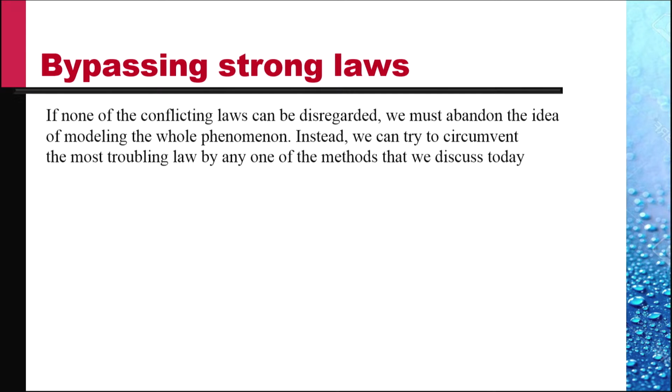Welcome back. We continue in this lecture the justification and process of relaxing the model rules. We discussed in earlier lectures that if there is a weak law conflicting with some strong laws, then we can neglect the weak laws, and we learned the techniques of doing so. But if none of the conflicting laws can be disregarded, we must abandon the idea of modeling the whole phenomena. Instead, we can try to circumvent the most troubling law by any one of the methods that we discuss today.

The first strategy is to restrict the generality of applications. The phenomena is broken up into a number of special cases, each governed by fewer laws than the entire phenomenon. And if enough special cases are investigated, and if they are all relatively independent of each other, an approximation of the total phenomenon can be obtained by superimposing results of these special cases.

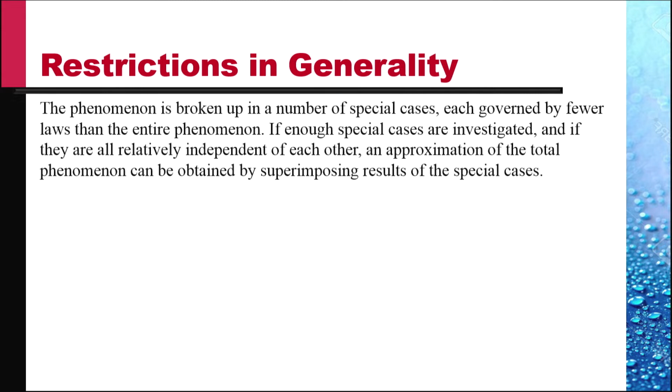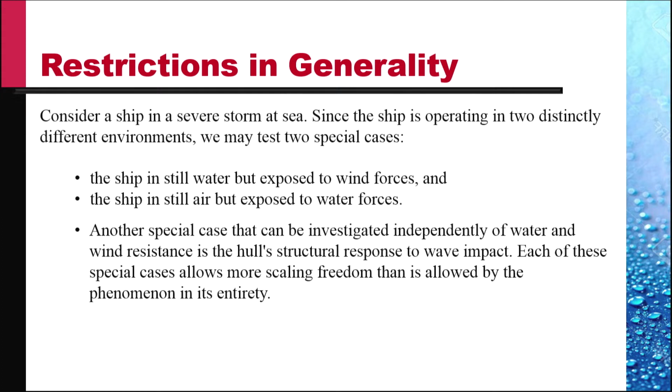Let us consider a ship in a severe storm at sea. Since the ship is operating in two distinctly different environments, the air and water, we can test two special cases. First, the ship is in still water but exposed to wind forces. Second, the ship is in still air but exposed to forces of water. Another special case that can be investigated independently of water and wind resistance is the hull's structural response to wave impact. Each of these special cases allows more scaling freedom than is allowed by the phenomenon in its entirety.

Let's do in detail an example of modeling of earth working machines. The soil-machine interaction system is ruled by 6 basic forces. First, the inertia of soil particles. Second, friction between soil particles. Third, cohesive force between soil particles. Fourth, the weight of the soil. Fifth, the elasticity of the soil. And sixth, the adhesion between soil and the machine.

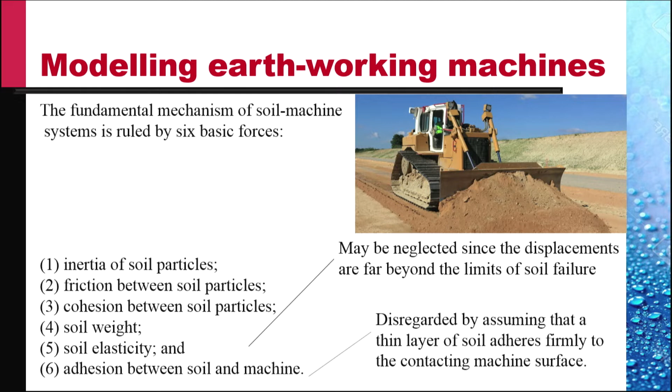Since the soil is being worked to this extreme, and the soil failure takes place in such machine interactions, we may neglect soil elasticity completely, since the displacements are far beyond the limit of soil failure. Similarly, the adhesion between soil and machine can be disregarded by assuming that a thin layer of soil adheres firmly to the contacting machine surface. So any further interaction of soil with this is only with the soil, not with the machine surface.

Thus, there are 4 laws that need to be modeled. The inertia of the soil particle is like rho L square V square. The friction between soil particles is modeled by F, the coefficient of friction. The cohesion between soil particles is like C L square, where C is the cohesive coefficient, and the soil weight, which is like rho G L cubed.

It is very difficult to choose soils with different values of rho, F and C. They go always as a package. We need to choose the same soil for the model test because of the second requirement above. The F itself is the pi number, and invariance of that would require that the value of F be the same. And if the value of F is the same, we can't choose rho, F and C except as a package. Therefore, the density and cohesivity are also the same. This requires that KL be 1. No scaling is possible. Hence, if we want to scale, relaxations are required.

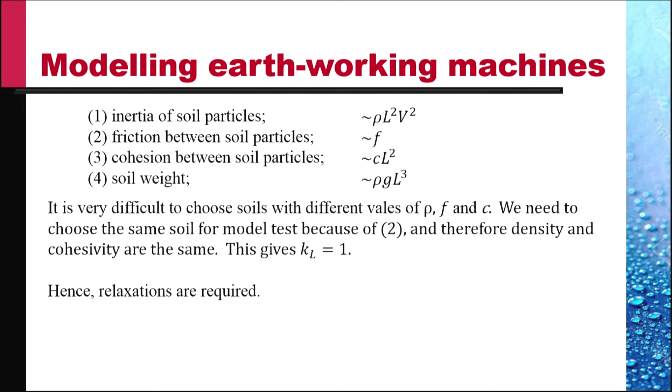So let us see how we go about this. One of the methods of taking care of this problem is to classify soils as sandy or clayey. Clay soils are entirely different from sandy soils. Normally, a soil has mixed properties, some clayey and some sandy. But let us separate these into two classes. The clay is composed of very small particles having the size of a few microns.

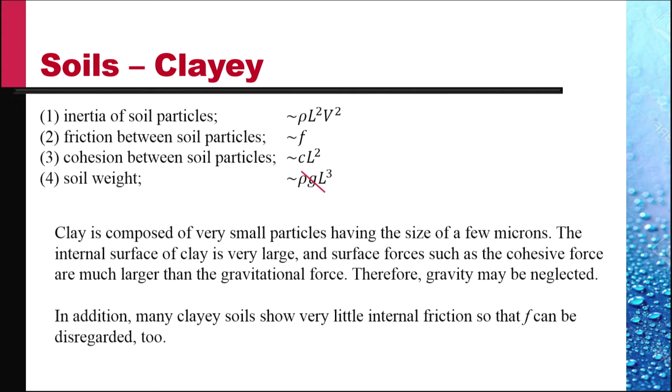The internal surface of clay is very large, and surface forces such as cohesive forces are therefore much larger than the gravitational forces. Therefore, the gravity may be neglected. In addition, many clayey soils show very little internal friction. There is largely cohesion, so that F can be disregarded too. So now only the first and the third law need to be modeled.

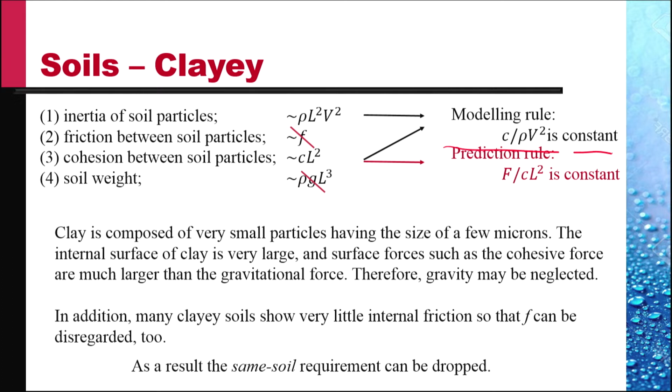So the same soil requirement can be dropped. We can choose different soils since we no longer need to keep F constant. The first and the third give the modeling rule that C by rho V square is constant. So the modeling rule is C divided by rho V square is constant, and from the third requirement we get the prediction rule that F divided by C L square is a constant.

On the other hand, if we deal with sandy soils, they are composed of relatively large particles having very little cohesion. Hence, the third requirement can be neglected. Since the inner surface of sand is small as compared to clay, the weight forces are substantial and must be taken into account, along with the internal friction between particles. Therefore, laws number 1, 2, and 4 above apply.

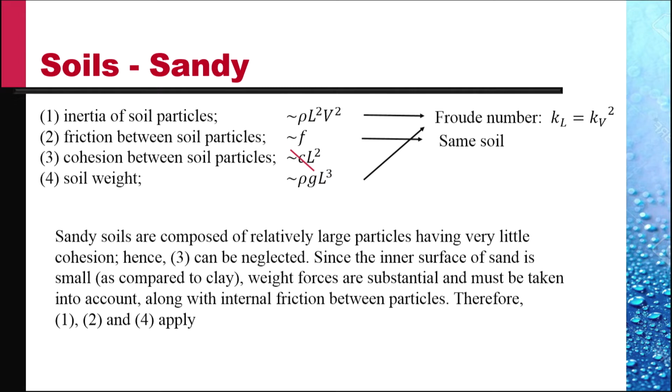From the first and the fourth, we get the Froude number, and the Froude number requires that KL be like KV square since KG is 1. This is the modeling requirement. We also need the modeling requirement that F be invariant. This requires that we use the same soil.

And then we get the prediction rule from the last law, that is the soil weight, and that is F divided by rho L cube is constant for sandy soils.

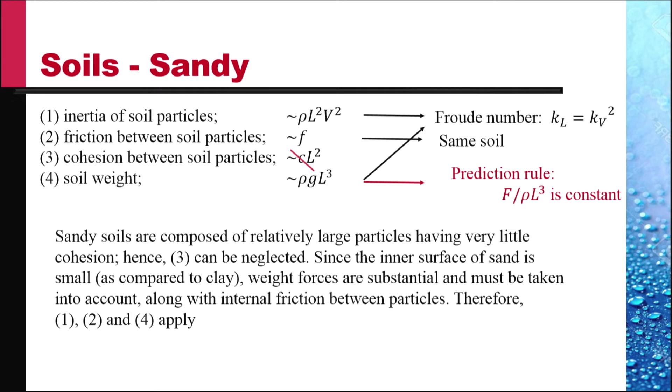Most natural soils possess characteristics of both clay and sand, that is, they are cohesive as well as having internal friction. These characteristics cannot be modeled simultaneously, but the special soils of either dry sand or soft clay may be modeled separately, because dry sand lacks cohesion and soft clay lacks internal friction. Hence, by testing the model of an earth-working device first in dry sand and then in soft clay, we can estimate with some confidence its performance in mixed soil.

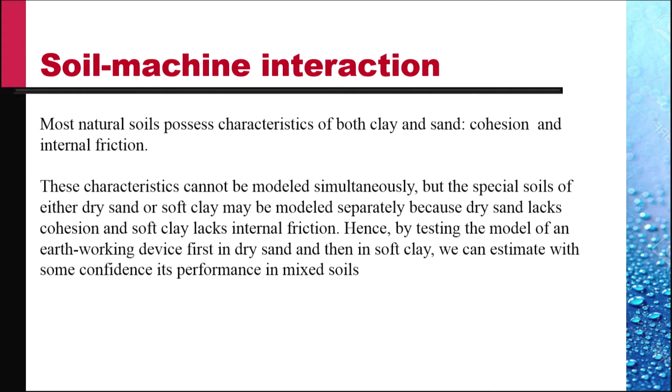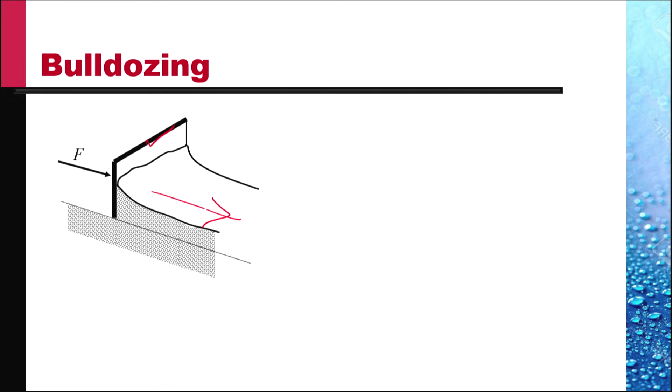Let us consider the process of bulldozing. Here, the blade of the bulldozer is pressing the soil with force F. If we do these experiments, then by changing the length scale KL, this dimension represents a length dimension. So by using different length scales, we determine the force required to move the sand.

In one experiment, we get these results. The slope of the line on the log-log plot is 1:2. This indicates that Kf varies like Kl square. And as discussed earlier, this means that this is a sandy soil.

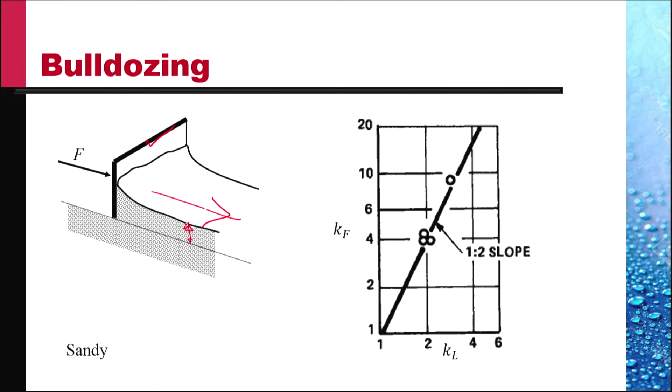In the other experiment, we are considering the vertical penetration of a slab B. As the soil gets compacted, the required force F increases as Z, the penetration distance, increases. So in our experiments, we measure the forces for various values of the B by Z ratio.

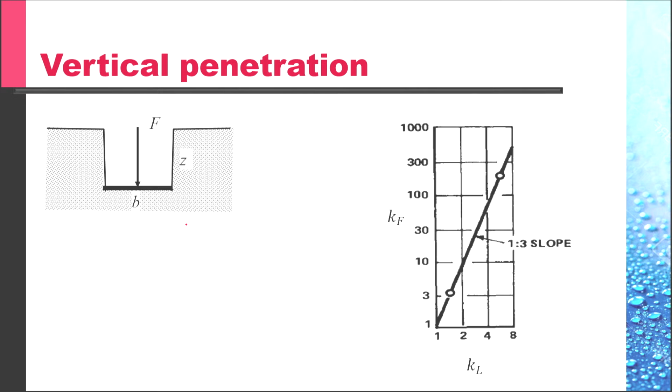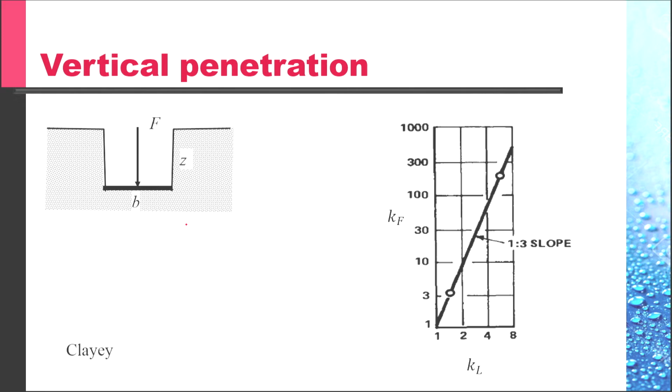In two different experiments, we use the same values of B divided by Z, so that the scale factor for B as well as Z is the same, the KL. And if we determine the force, the variation of force by KL on a log-log plot is with a slope of 1:3. This means that F varies like KL raised to power 3. This we saw is valid for clay soils. So if we do this experiment, we get data for clay soils: how does the force of penetration vary with penetration.

Another class of techniques involve simulation of law, and this is a very interesting class of techniques. In vibration and deformation of structures under external loads, as well as their own weight, two laws come into play.

Elasticity, the elastic force, is like sigma times A, which is E epsilon L square, where E is the elasticity, epsilon is the strain, and gravity force is like mg or rho L cube g, which gives you KL is equal to KE by K rho, a single pi number, which is K of E by rho. And E by rho is nothing but the wave speed in the material, the speed of the longitudinal waves in the material.

So we must keep the length scale as Ka square, where A is the wave speed. Now, for metals, the range of wave speeds is very limited. We compare steel to an exotic material like silver: A square changes by a factor of 3 only. So the maximum value of KL that we can use is 3 if the model is made of silver. Obviously, that is not going to fetch us much returns.

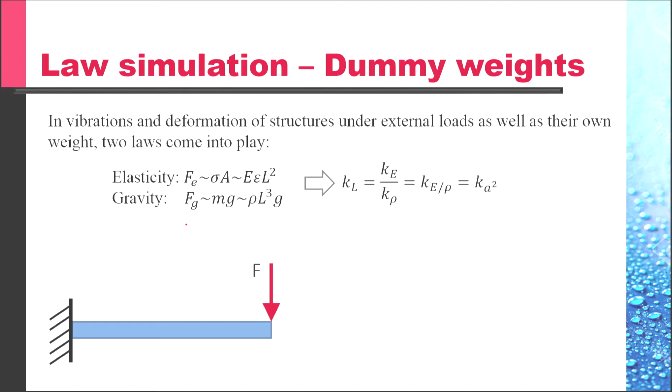So we need to simulate the law of elasticity. This difficulty can be overcome, however, by increasing the weight of the model structure without changing its elastic properties. That is why we use the term dummy weights. This is done with a series of equally and closely spaced dummy weights attached rigidly to the model structure. Thus, to this cantilever beam, we could attach a series of equally and closely spaced dummy weights.

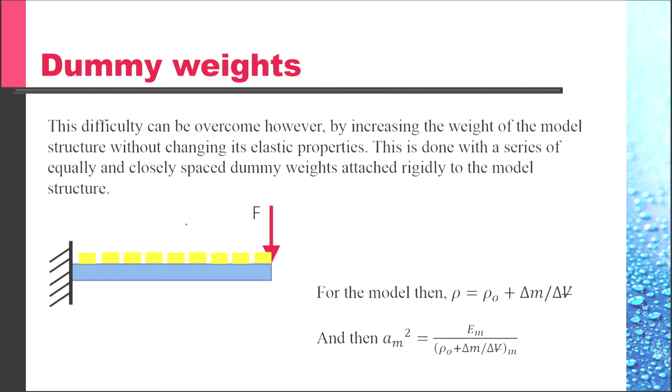Since these dummy weights are not connected together, they contribute very little to the elastic modulus, but increase the effective density. So, for the model, the density rho can be written as rho naught, the density of the base material, plus delta m by delta v, where delta m is the dummy weight per unit volume of the basic beam. And then A square for the model is nothing but E divided by rho naught plus delta m by delta v for the model. Thus, we are able to change A square for the model drastically.

There was a cable-stayed bridge. Several weeks after being opened to traffic, the bridge was observed to vibrate vertically in winds between 40 and 50 kilometers per hour at a frequency of 0.6 hertz. Only in a small window of velocities, 40 to 50 kilometers per hour, did the bridge vibrate, and the frequency was about 0.6 hertz.

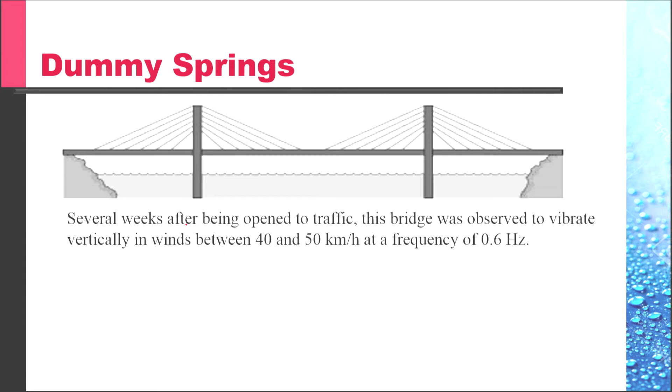Now, why would the bridge deck vibrate? The deck of the bridge vibrates because of the vortices that are shed from it when the wind blows past. If I have a rectangular section as shown here, representing the section of the deck of the bridge, as the wind blows past this, a series of vortices are shed.

These vortices, when shed alternately from the top and bottom of the cylinder, apply a vibratory force on the cylinder, a force up and down. And if the frequency of this vortex shedding matches the natural, resonant frequency of the bridge deck, the bridge could develop very large vibrations.

The frequency of shedding of these vortices is governed by a constant value of the Strouhal number, FL by V. So given a natural frequency of the bridge and the length, which in this case would be the height of the deck of the bridge, this would be resonant only at a particular velocity, and that velocity is between 40 to 50 kilometers per hour.

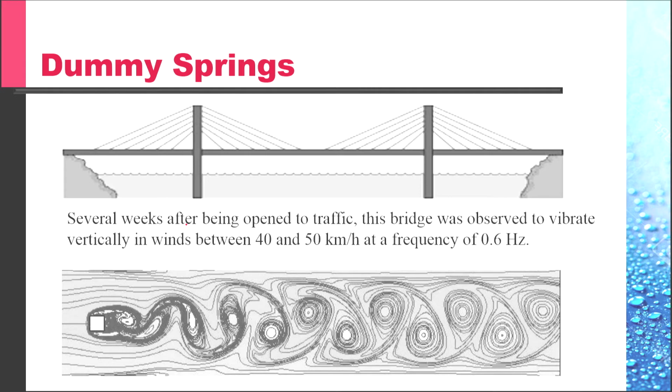After we change the design, we need to test it in a wind tunnel. One method is to use dummy springs. It is very difficult to match the springiness and the mass of the whole bridge.

So we take a section of the deck of the bridge, put it inside the cross section of a wind tunnel, and suspend this model on a set of linear springs outside of the wind tunnel as shown. The strength of the springs, the spring constants, are adjusted so that they give a frequency equal to the natural frequency of the actual deck. Using these dummy springs, we could model the bridge in the wind tunnel.

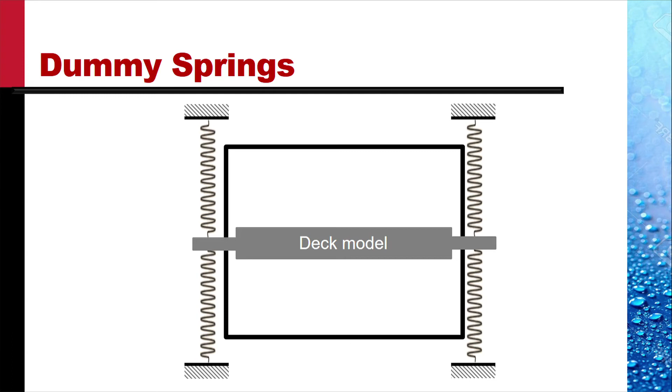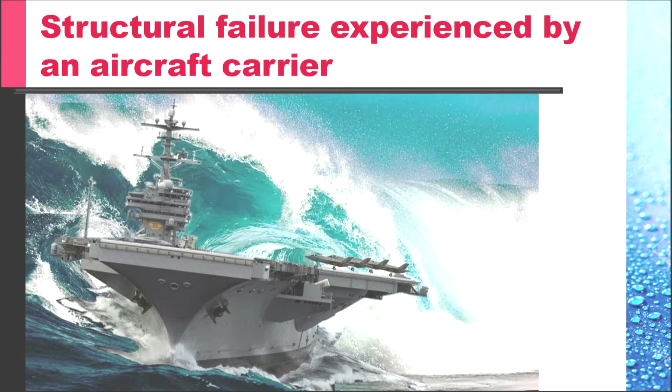Let us do in some detail the modeling of a structural failure experienced by an aircraft carrier. This was an American carrier which broke up in a storm.

The ship's behavior is assumed to be governed by inertial forces of the ship and of water, governed by Newton's law of inertia, and by the weight of the ship and the water, and the elastic forces of the ship. Since the propulsion is of no immediate interest, resistance due to fluid viscosity is neglected.

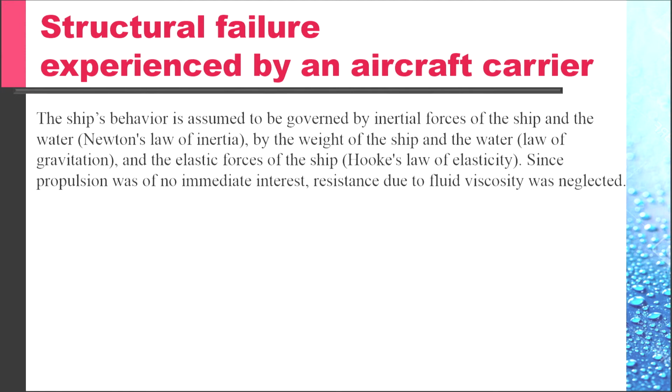Inertial forces, or the law of inertia, F varies like ma, gives us a pi number F divided by rho L square V square, in line with similar expressions obtained earlier. The law of gravitation gives a pi number F divided by rho G L cubed. The elasticity law gives a pi number F divided by E epsilon L square, as was done in the previous example of the vibrating beam.

Inertia and the gravitational law give you a pi number, the Froude number, V divided by under root GL. Elasticity and inertia give you the Cauchy number, rho V square by epsilon E. Since K epsilon, being non-dimensional itself, is treated as 1, we get KL equal to KE by K rho, same as we obtained before.

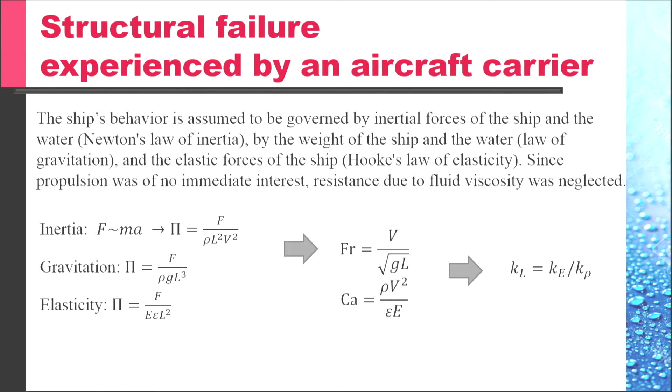Since the model tests are usually performed in water, K rho is 1. The density, being a representative quantity, stands not only for the density of water but also for the density of ship structure. The ship's model, therefore, is to be constructed of material with the density of steel, but with modulus E vastly smaller than that of steel. Such a material does not exist.

So it is not possible to model the phenomena fully. Therefore, we reduce the scope of the study and restrict the model study to the bending vibrations of the ship, infusing analytical knowledge of bending vibrations in determining the laws of modeling.

The law of bending vibrations is governed by the equation that the bending moment M is like EI, the bending modulus, into d2y by dl squared. So moment varies like EI divided by L, and so the force would vary like EI divided by L square. So the relevant pi number is FL square by EI, considering only the bending vibrations of the beam.

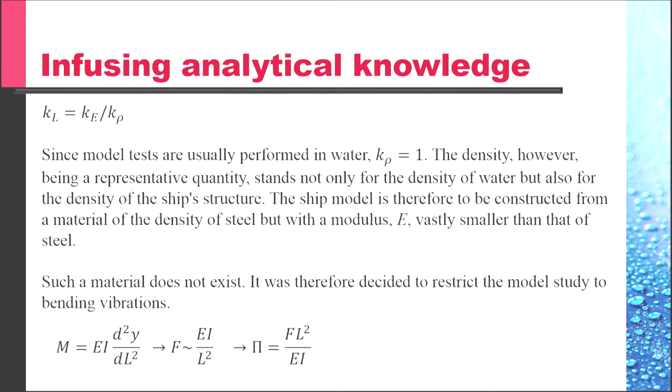So we start with this, and then the Cauchy number becomes rho V square L square divided by EI divided by L square, or L4 rho V square divided by EI. Recall that I varies like L raised to power 4 if the shape of the beam is geometrically similar. So we'll distort the similarity of the beam such that I does not vary like L raised to power 4.

If we use the same material, that is, if we use rho and E as the same, K rho and Ke to be 1, then Kv becomes equal to under root Ki divided by Kl raised to power 4. And the Froude number, which requires that Kv be like under root Kl, results in Ki being like Kl raised to power 5.

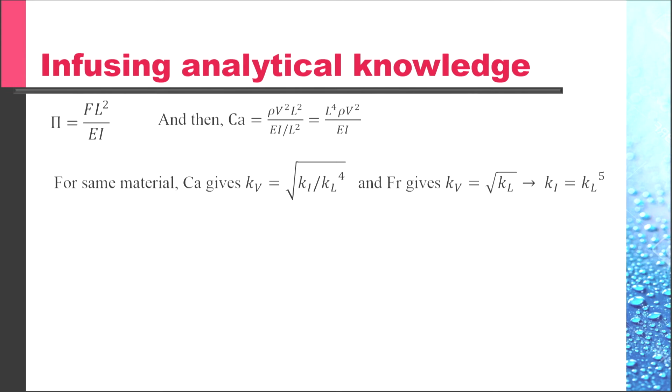In one study, the selected length scale factor was 136. Therefore, a model had to be built of the same material as the prototype, whose area moment of inertia, that is I, was 136 raised to power 5 times smaller than that of the prototype. Ki was 136 raised to power 5.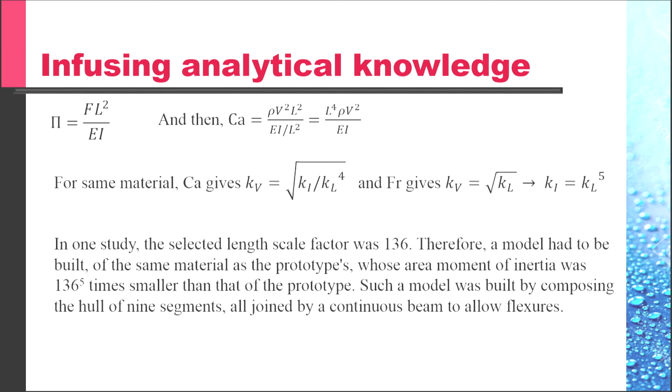Such a model was built by composing the hull of 9 segments, all joined by a continuous beam to allow flexures. Thus the hull of the ship consists of 9 segments, all connected by a beam inside, and the design of the beam was such that the I was scaled as KL raised to power 5.

The area moment I of the prototype was calculated by a computer study. The model beam was varied to make it conform to the model rule, that is, I of the model is equal to I of the prototype divided by 136 raised to power 5. This model was then used to study the ship's vibratory response in regular and irregular seas.

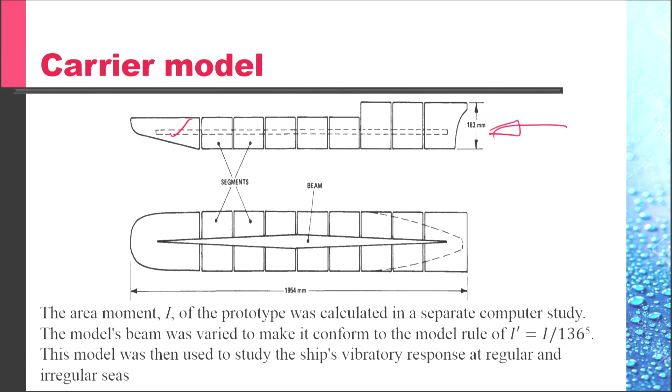Let us consider how to model the performance of an icebreaker. Icebreakers work in generally two modes.

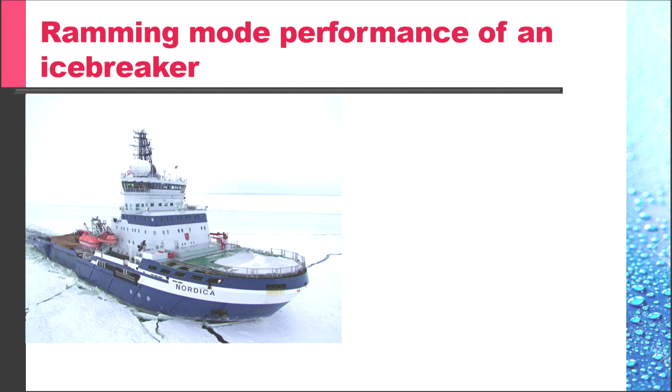One is the continuous mode, where the nose of the icebreaker ship penetrates the layer of ice on the sea. The other method is the ramming mode, which can be divided into three phases.

The ship impacts and crushes the ice, and it slides upon the ice. The weight of the ship now acting on this ice causes the ice to bend and finally to break.

The ship again advances, crushes more ice, slides further on the ice, and then breaks the layer of ice because of its own weight. The ice cracks around the ship.

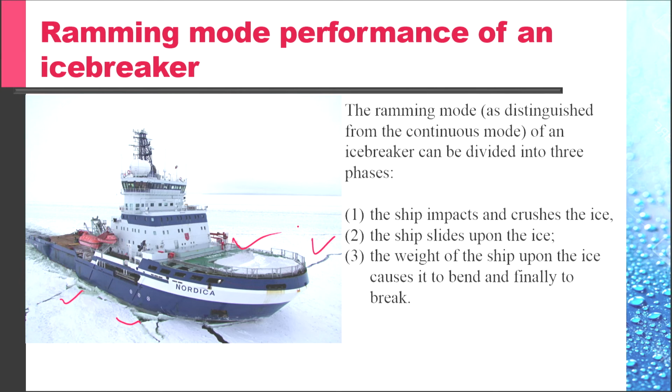In this process, three forces dominate: the inertial forces of the ship, the gravitational forces of the ship, and the ultimate stress forces of the ice.

The ice is breaking, so it is controlled by the ultimate stress force of the ice. All other forces, due to the acceleration and submersion of broken ice and to friction and wave making, play only minor roles and can be neglected.

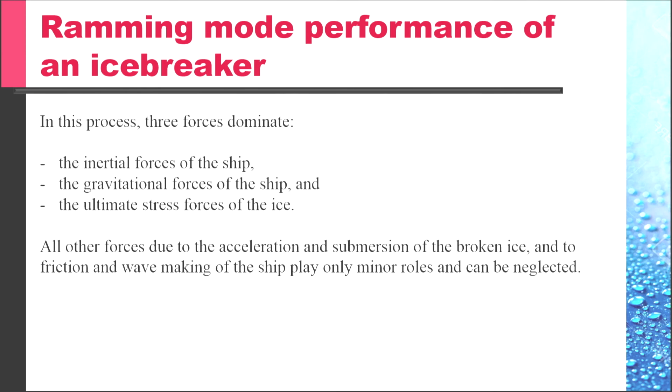Newton's law of inertia gives a pi number F divided by rho v squared L squared. The law of gravitation gives a pi number F divided by rho L cubed G. And the ultimate stress relation gives a pi number F divided by sigma u L squared, where sigma u is the ultimate stress of ice.

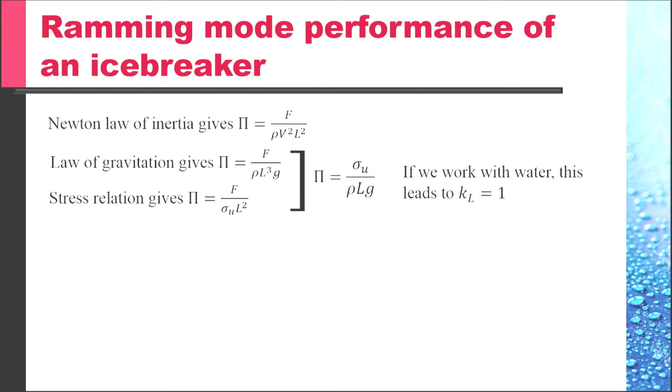The last two give a pi number sigma u divided by rho L g. The model also operates in water so that rho, g, and sigma u are all the same, their scale factors being 1. And so this leads to KL equal to 1. That is, no scale model is possible. We'll have to work with the full scale model.

In a situation like this, we infuse some analytical knowledge, and this often proves useful. Here it is assumed that because the failure of ice is mainly ascribed to its being bent, the ice will follow the theory of flexure.

The bending moment is expressed as the bending moment M equals the force sigma u L z. We use a different length scale in the vertical direction, the direction of the thickness of the ice layer. So if the thickness of the ice layer is Z and L is the horizontal length scale, then the area of the ice layer is L times Z.

When we apply the moment, we determine it by multiplying the force with Z, so that the moment M varies like sigma u L Z squared, rather than sigma u L cubed if we had used Z as the same scale as L.

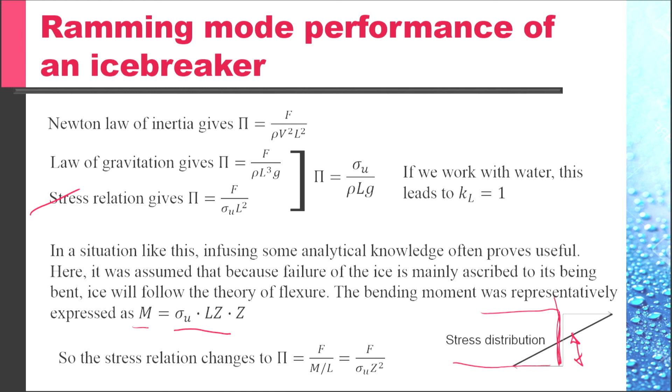Using this, the invariant pi number becomes sigma u Z squared divided by rho L cubed G, for K sigma u, K rho, and K g all equal to 1. That is, if we work with water, this leads to Kz equal to Kl raised to the power 3 by 2.

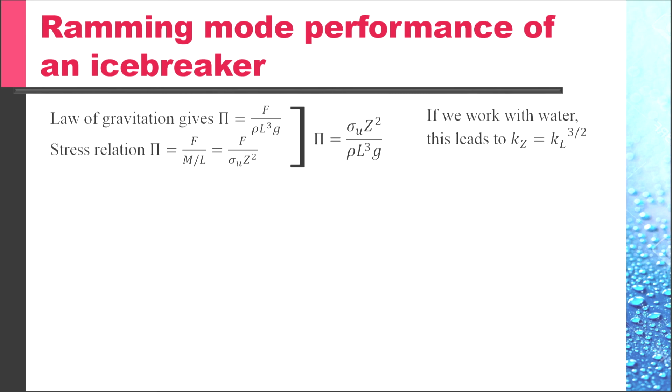We can choose any Kl provided we scale the thickness of the ice layer differently, according to Kz equal to Kl raised to the power 3 by 2. With Kl equal to 50, Kz is 354. A much thinner layer of ice than would be dictated by strict geometrical similarity.

This is a result that could be easily implemented in the controlled environment of an Arctic pool where the experiments are done.

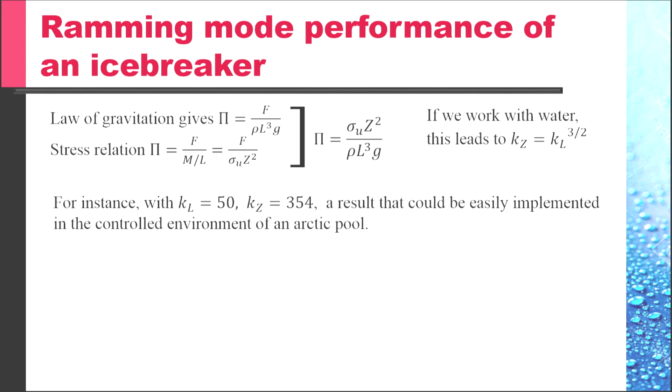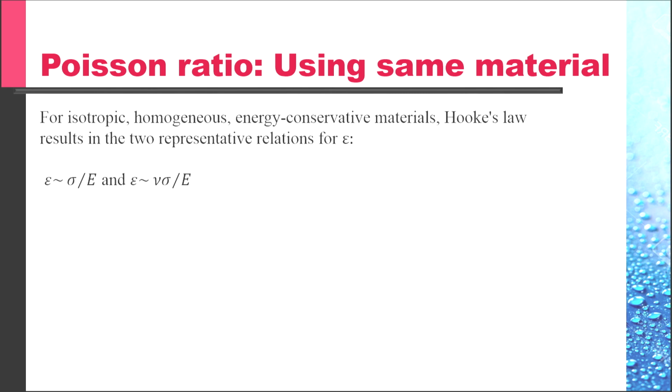For isotropic, homogeneous, energy conservative materials, Hooke's law results in two representative relations for epsilon. Epsilon varies as sigma divided by E in the longitudinal direction, and epsilon varies like nu, the Poisson ratio, times sigma divided by E in the transverse direction.

It is obvious that geometrical similarity between the model and the prototype can be satisfied only if either the same material is used, so that E and nu have the same values in the model and prototype, or different materials are used with different moduli of elasticity but still the same Poisson's ratio.

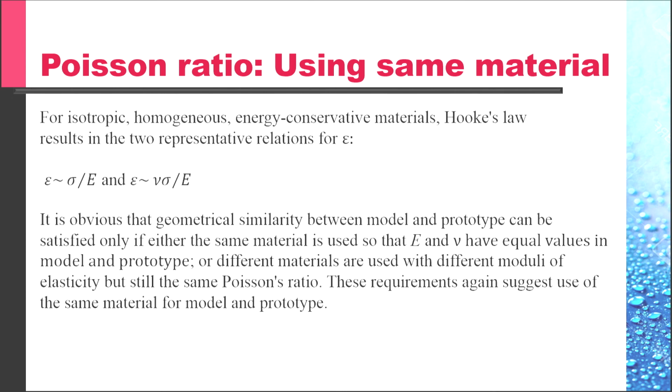These requirements again suggest use of the same material for model and prototype. The condition of same material can be relaxed only if the transverse deformations are disregarded. Then the influence of Poisson's ratio becomes unsubstantial and permits the use of different materials for model and prototype. This disregard of Poisson's ratio is an important relaxation in almost all structural problems.